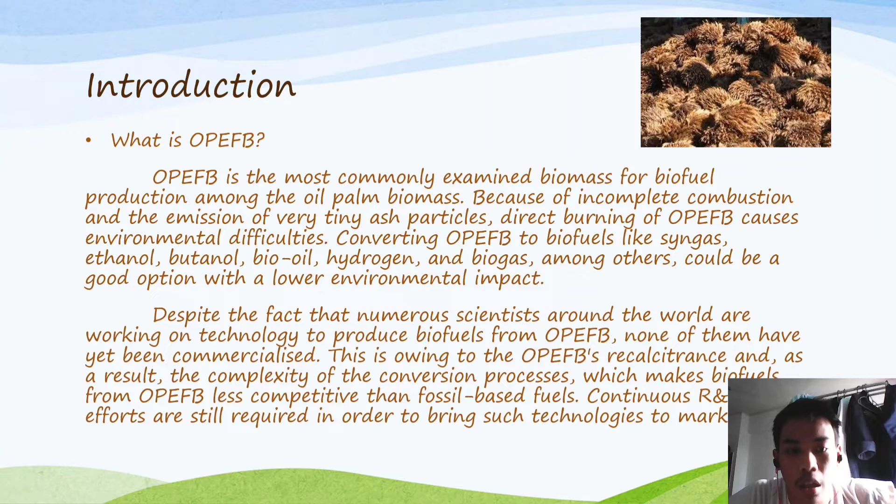could be a good option with a lower environmental impact. Despite the fact that numerous scientists around the world are working on the technology to produce biofuels from oil palm empty fruit bunch, none of them have yet been commercialized. Continuous research and development efforts are still required in order to bring such technology to market.

Source of waste produced and its quantity. In tropical places such as West Africa and Southeast Asia, Elaeis guineensis, the scientific name of oil palm, is one of the most cost-effective perennial oil crops due to its valuable oil-producing fruits. These fruits are frequently peeled off the fruit bunch during the oil extraction process, leaving the empty bunches to be dumped as residues. In the oil palm business, empty fruit bunches of Elaeis guineensis are commonly considered waste.

The abundance of oil palm empty fruit bunches has resulted in a slew of environmental problems, including pest attraction, greenhouse gas emission, and soil acidification. Over 22.4 million tons of empty fruit bunch were estimated to have been generated globally in 2014. On average, millions of tons of oil palm empty fruit bunches are produced each year in various regions throughout the world. Malaysia, for example, produced nearly 5.2 million tons of empty fruit bunch in 2002.

As a result, Malaysia's oil palm sector is the largest supplier of biomass. This biomass leftover is produced in vast amounts every year, with only a tiny percentage being transformed into valuable products, the majority being left unused.

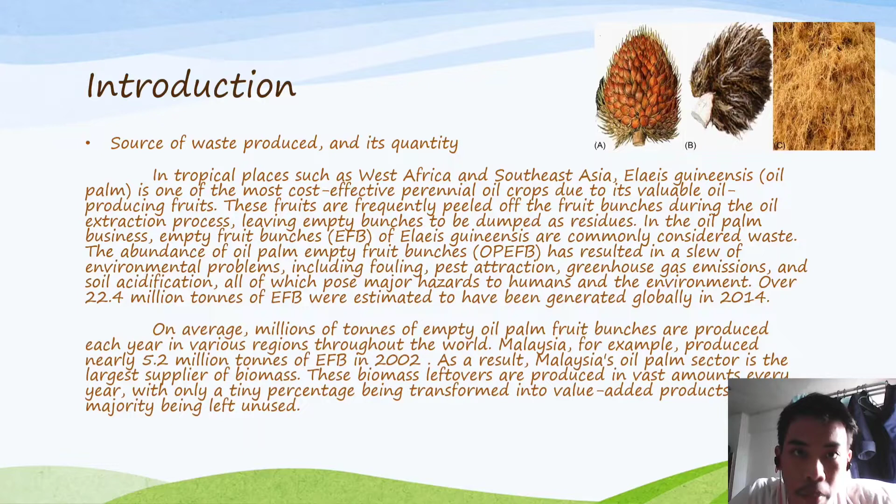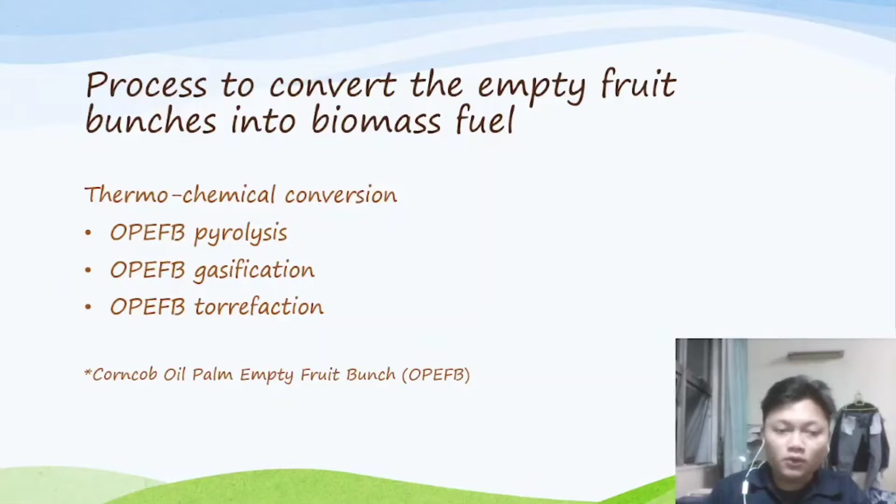Now I will be presenting the process to convert the empty fruit bunches into biomass fuel. There is one process, which is thermochemical conversion, and there are three types of it, which are OPEFB pyrolysis, gasification, and torrefaction. OPEFB is short for oil palm empty fruit bunches. The first one is OPEFB pyrolysis.

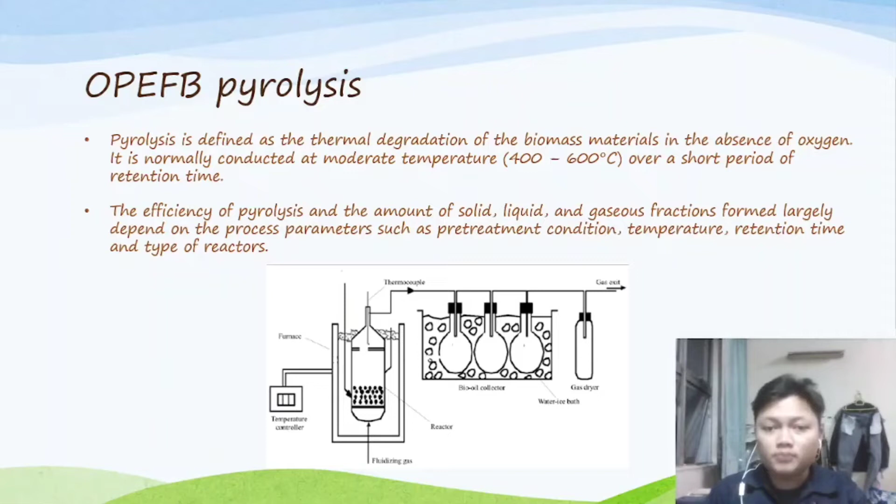Pyrolysis is defined as the thermal degradation of the biomass material in the absence of oxygen. It is normally conducted at moderate temperature, 400 to 600 Celsius, over a short retention time. The efficiency of pyrolysis and the amount of solid, liquid and gaseous fractions formed largely depend on process parameters such as pre-treatment condition, temperature, retention time, and the type of reactor.

The second one is OPEFB gasification. The gasification process is an extension of the pyrolysis process, except that it is conducted at an elevated temperature range of 800 to 1300 Celsius, so that it is more favorable for gas production. Biomass gasification offers several advantages, such as reduced CO2 emission, compact equipment with a relatively small footprint, accurate combustion control, and high thermal efficiency.

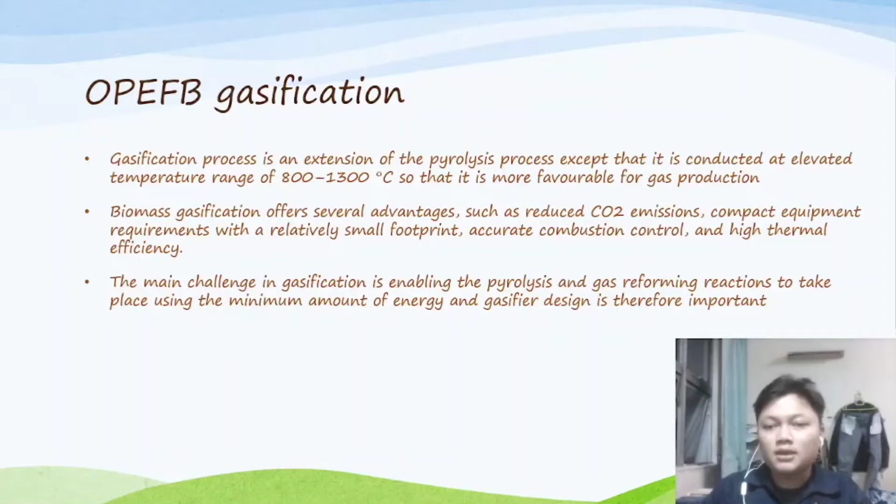The main challenge in gasification is enabling the pyrolysis and gas reforming reactions to take place using the minimum amount of energy, and gasifier design is therefore important. The last one is OPEFB torrefaction. Torrefaction is the thermal conversion method of biomass in the low temperature range between 200 to 300 Celsius.

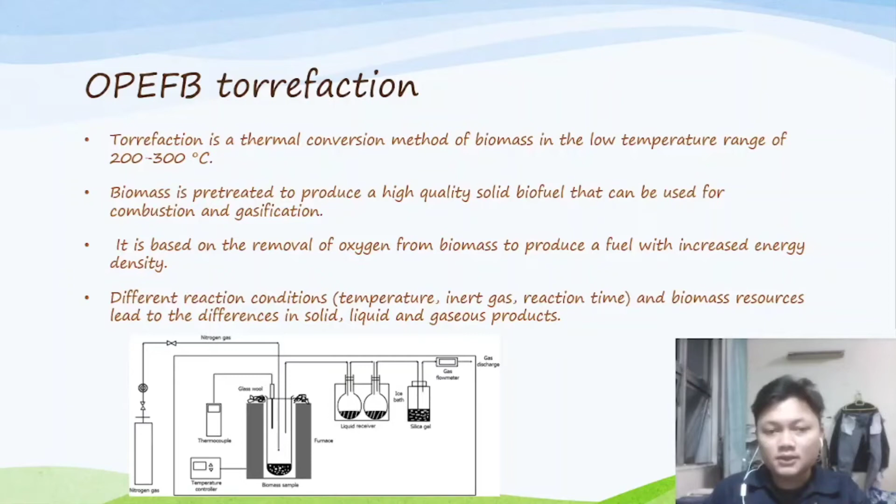Biomass is pre-treated to produce a high-quality solid biofuel that can be used for combustion and gasification. It is based on the removal of oxygen from biomass to produce a fuel with increased energy density. Different reaction conditions, such as temperature, inert gas, reaction time, and biomass resources lead to differences in solid, liquid, and gaseous products.

Lastly, the analysis of thermochemical conversion of OPEFB suggests that gasification is the most suitable thermochemical route for OPEFB conversion to biofuel. It has the highest carbon conversion, which is more than 90%, and biofuel yield.

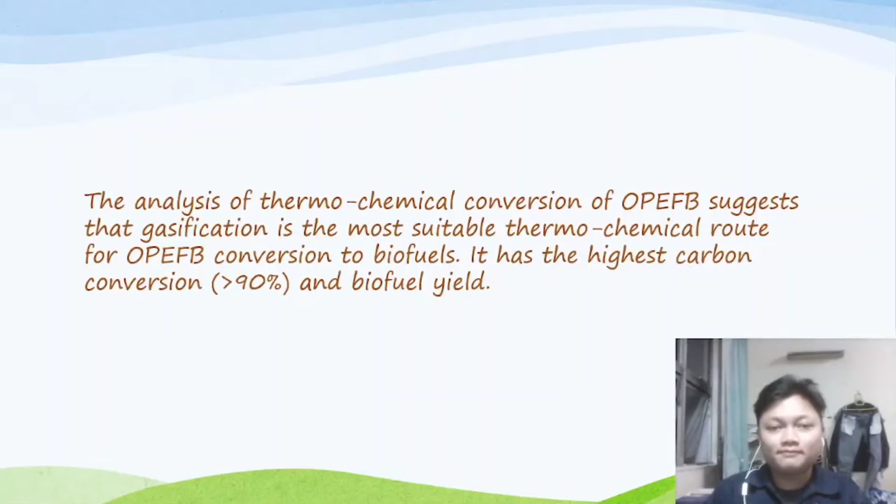Explain about the application of biomass fuel. The use of biomass fuel for transportation and electricity generation is increasing in many developed countries as a means of avoiding carbon dioxide emission from fossil fuel use. In 2021, biomass provided nearly 5 quadrillion British thermal units, about 5% of total primary energy used in the United States.

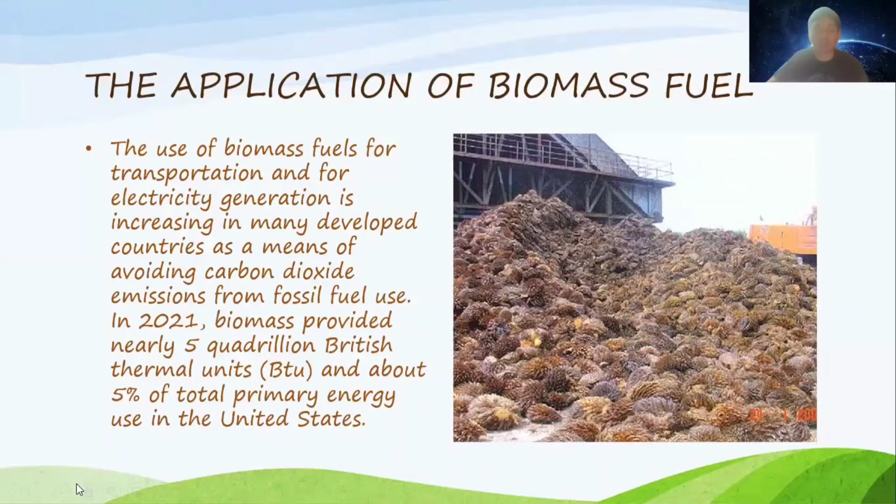First, the application of biomass fuel. An example of biomass fuel is biodiesel. As we know, trucks and buses run on diesel, while in agriculture, tractors use diesel. In the United States, over 80% of trucks and buses run on diesel. The benefit of biomass is it makes biodiesel. It is safe and biodegradable, produces significantly less air pollution, and it can reduce GHG emission.

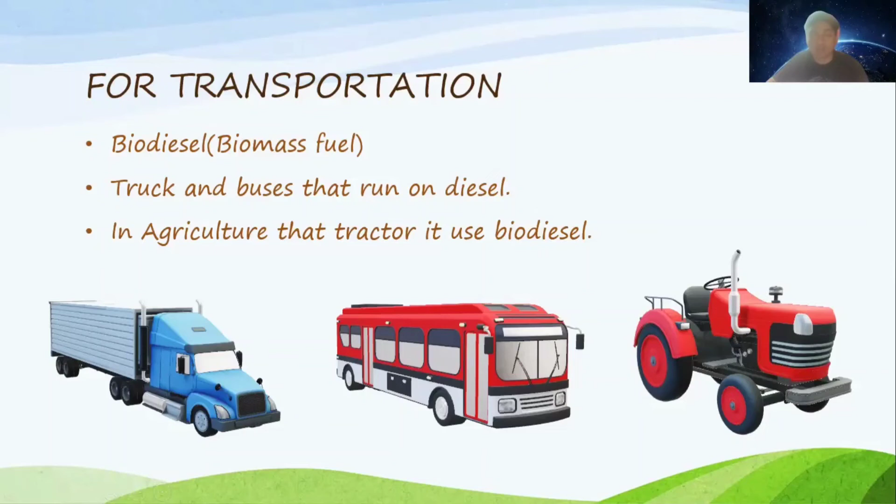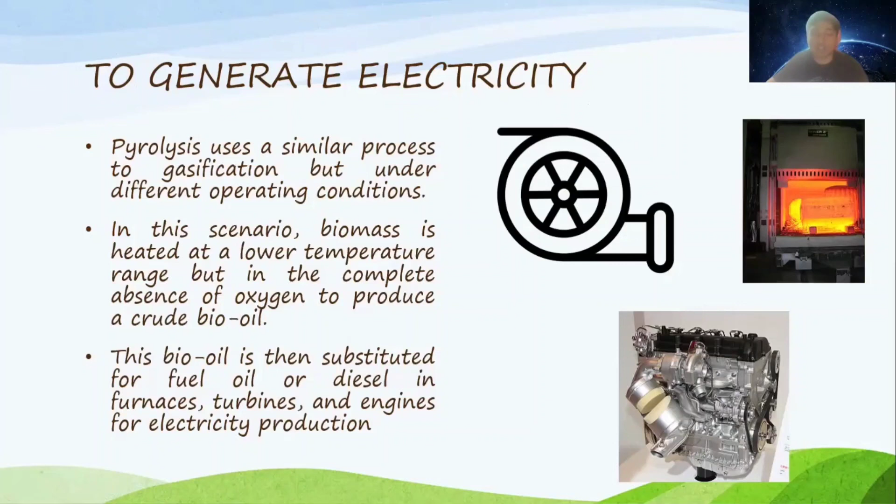The second application is that biomass fuel can generate electricity. To generate electricity, a process of pyrolysis is used, similar to gasification under different operation. In this condition, the biomass is heated at a lower temperature range in the complete absence of oxygen to produce crude bio-oil. Bio-oil functions as a substitute for fuel oil or diesel. It is often used in a turbine or an engine for electricity production.